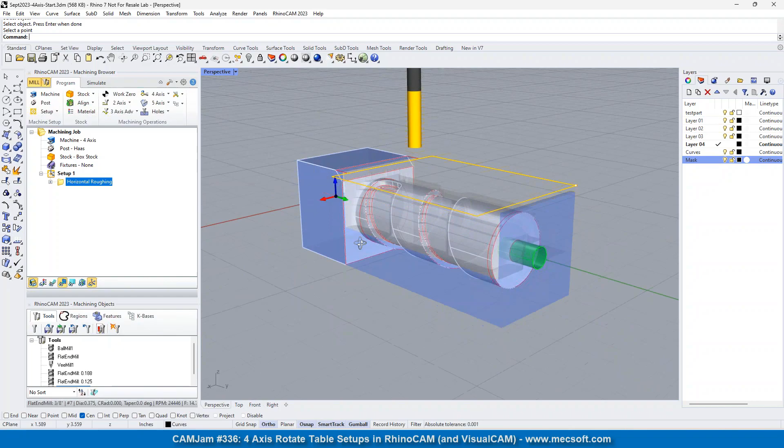And what we're going to do now is rotate the rotational axis so that the z-axis is pointing downward. So we're going to machine the bottom side. Now in the machine, we're talking top and bottom, but on your machine, it will actually be rotating upward. Obviously, you're going to machine the top, and then it'll rotate up and then machine the bottom.

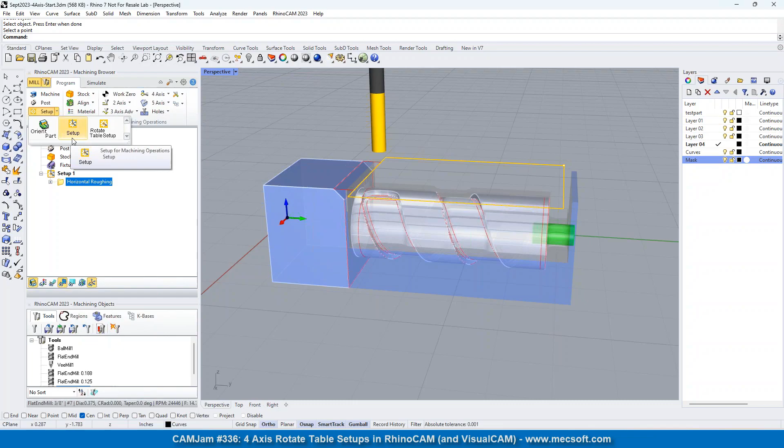So we're going to do a setup. And instead of a regular setup, we're going to do a rotate table setup. And we're going to rotate the table 180 degrees with the z-axis pointing down.

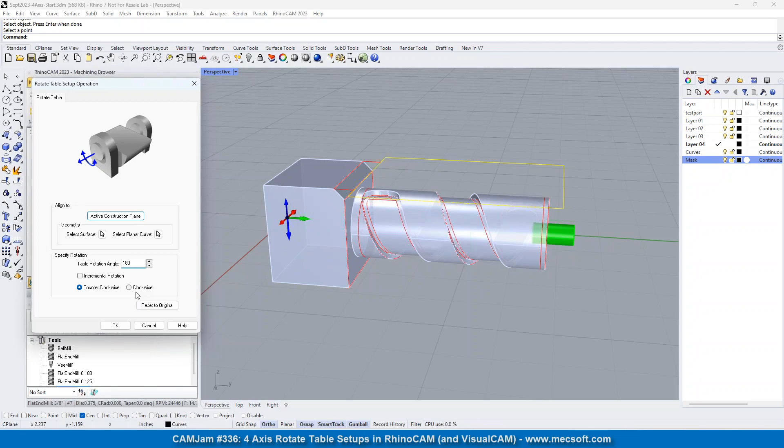So when you do the rotational axis, always pay attention to where the z-axis is displayed on the screen, because it'll tell you what orientation your parameters that you have selected are in, so that you can verify it visually. We're going to pick OK. So we have setup 2 selected, and you'll see that the z-axis is pointing down.

So now all we got to do in 4-axis, it's really easy for roughing. We're just going to copy this, and then we're going to select setup 2, and then we're going to paste it.

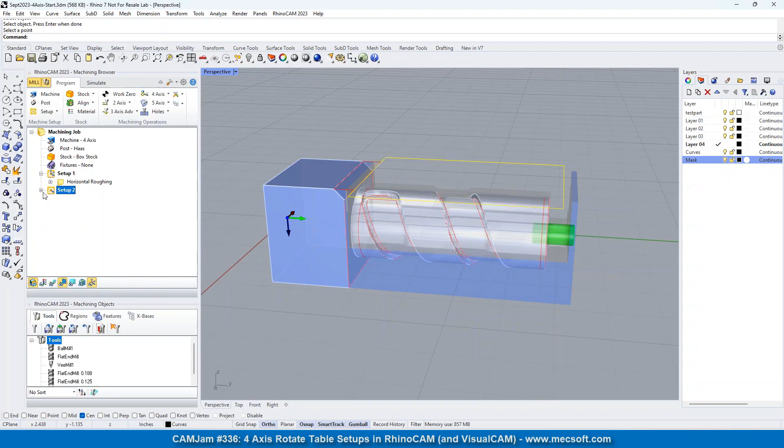Okay, so now we got a roughing on the bottom. We're just going to generate that. And then we're going to go ahead and simulate it. So really on your machine, it's going to be rotated up like that.